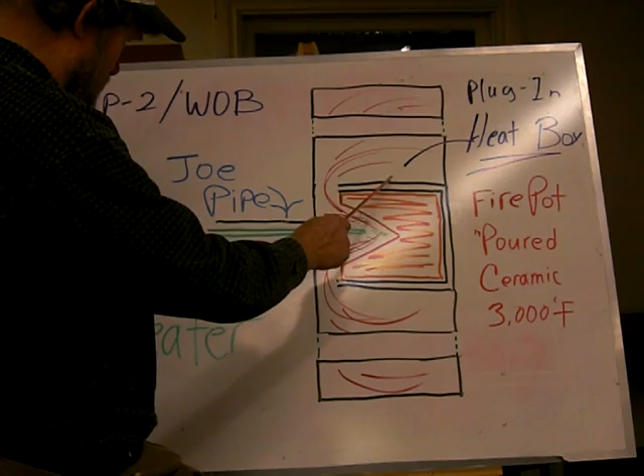And as I was saying in the first video, the heat plenum has an exhaust plenum around this. So you have to have somewhere for the exhaust to go through. So you allow the exhaust to filter around the heat plenum.

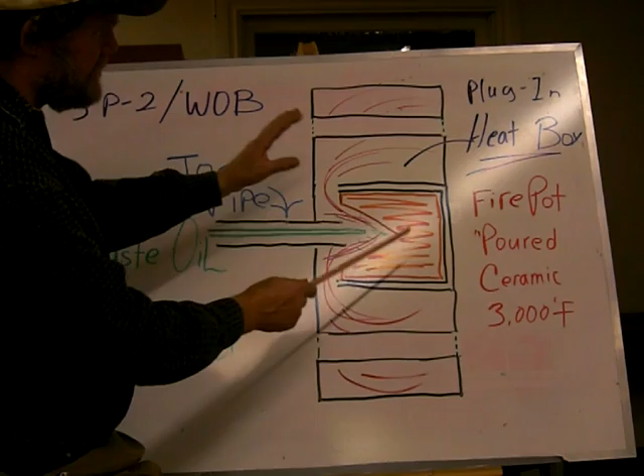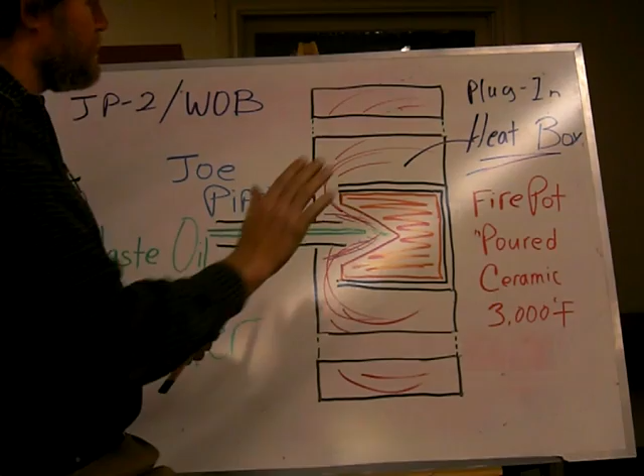And in order to lock one together with the other, basically the exhaust plenum would be suspended around the heat box. And that's one of the reasons for these pipes here, is that you could actually line up the bodies, take a pipe and slip it through the exhaust and into the heat plenum, and it would make the two units into one piece.

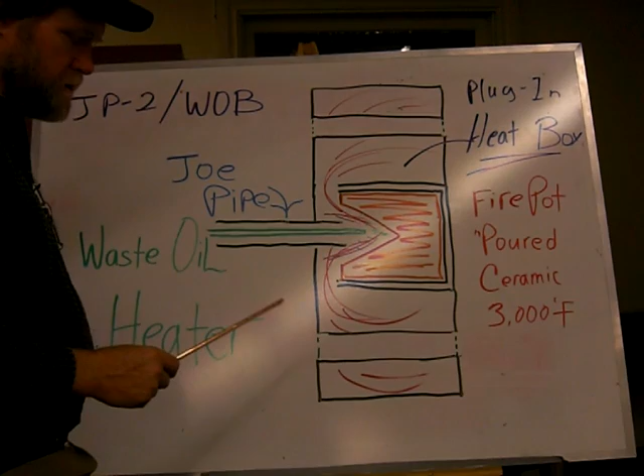So say for example these tubes could be filled with sand. You may have 6 large pipes at the geometric location here, and the inner part you probably wouldn't want these filled with sand, but on the outer ones you would, well, I guess you could fill them with sand. So the pipe that goes in there, like a keyway to lock everything into position, you could have it full of sand.

So the sand would pull out more of the, extract more of the heat, because you're talking intense heats here. And if you use sodium or salts for something like this, it wouldn't work. You just don't have the circuit for it.

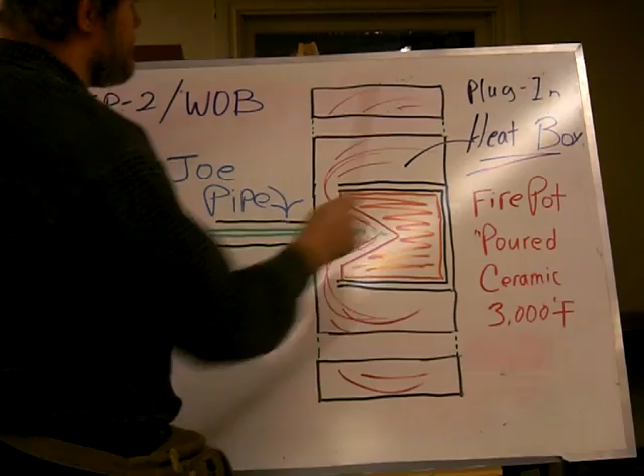And say for example, if you wanted to heat up hot water, you could have a sand cartridge already made up with a pipe going through it, just like those cartridges for soft water and all that. You just plug them in. You just plug your cartridge in here and snap on your water lines or steam lines, whatever you're doing, and you'd have almost a 24-foot area where the water would be heating as it's passing through, and more than one area.

And around your exhaust plenum, you would have like an outer plenum, and that would be your final plenum. And that might be a little wider apart.

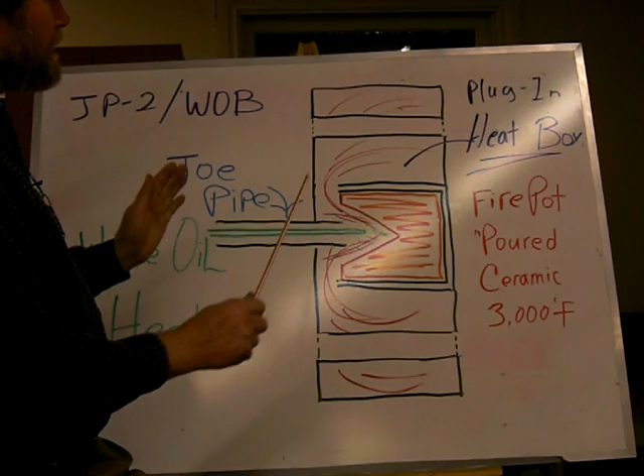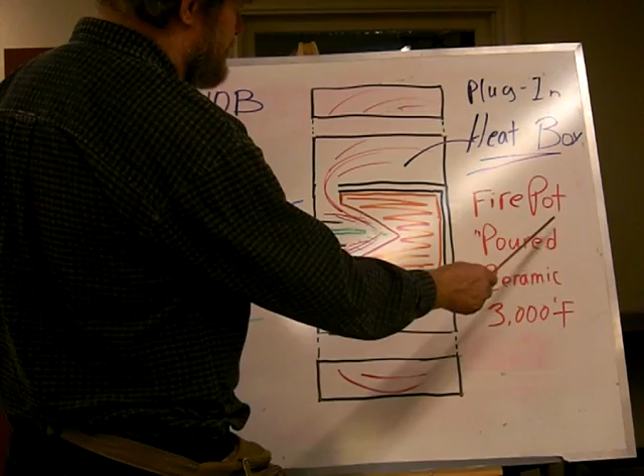So the heat's enclosed in here, the exhaust is enclosed in here, and all that heat wants to go out. So between your exhaust plenum and your air plenum, you might see anywhere from 400, 500, 600 degrees of heat, and maybe 400 or 500. I can live with that.

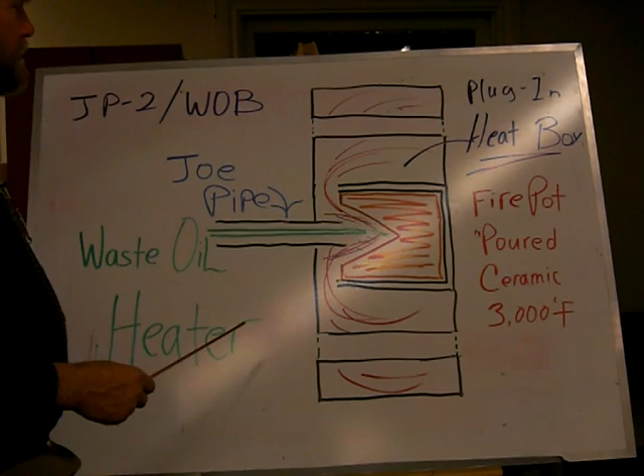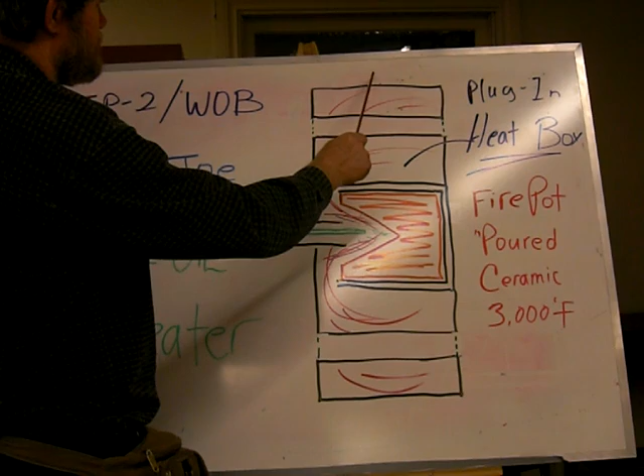So you have a large area that's very intense heat, and in your air plenum you might have holes around the periphery similar to this, and even in your exhaust plenum you could have holes going through where the exhaust heat would heat up the pipes, and you could maybe use that for just blowing outside air through. So the holes within your exhaust plenum would go into your air plenum.

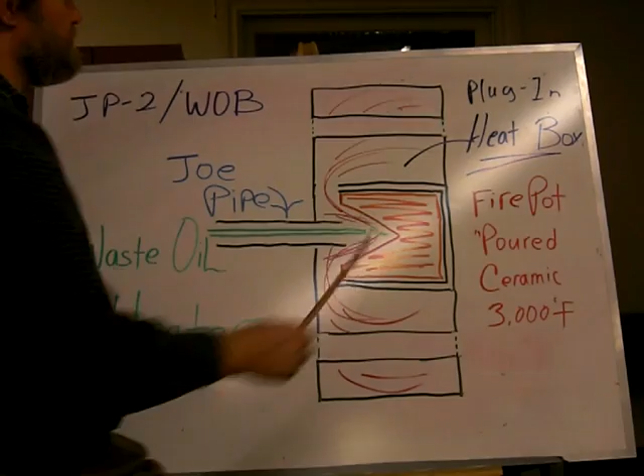And then all you do is have a big fan on the back, and you're just pumping 500 cubic feet per minute into the air plenum. So this side of the pipes would be connected open to the outside. So you'd have a good 6 pipes, about so big, a couple inches round, pumping out high volume air. And it definitely would work here.

So you'll be able to take your sand cartridges and put it in there. If you wanted to convert your hot air tubes into heating water, not a problem.

I know the Lord speaks to me. Most times He just puts the knowing in me, and just shows me the pictures. And in one moment at a time, you can see how, like envision the whole thing. And that's kind of where this came in.

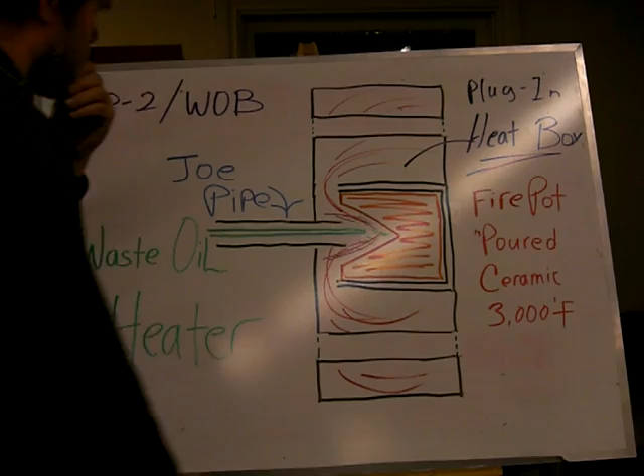And this could be made simply. And once we know that this is going to work, I'm kind of appealing to you experts out there. Is this going to work?

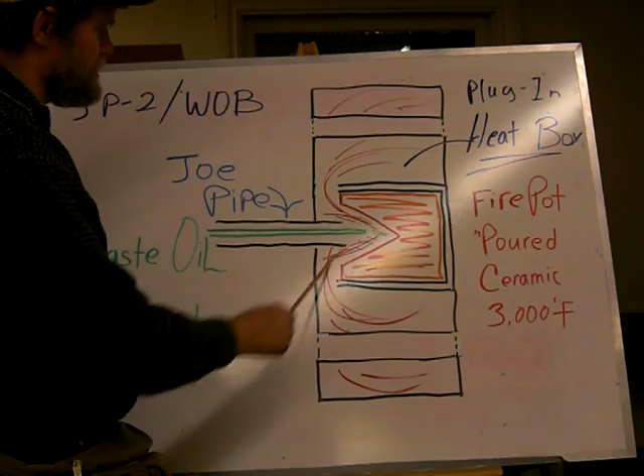Now, if you got your 2,000 degree flame going into here, and you might be adding steam in here to boost the heat from, say, 2,000 up to about 3,000 degrees. And so your fire would more or less be spun to the outside. And so you're doing your best to disperse the heat.

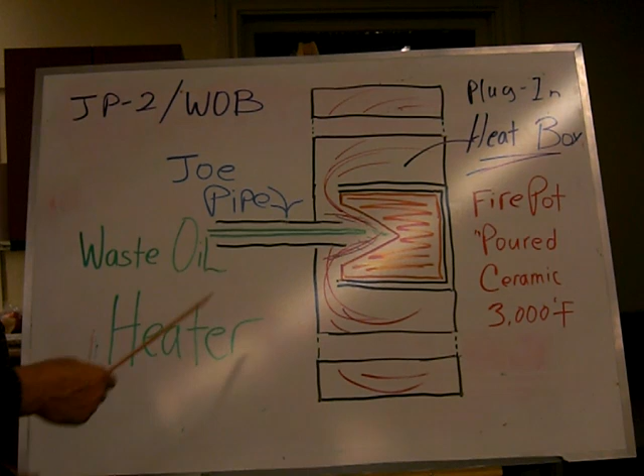Because otherwise I think the whole thing would go into meltdown. Or you could probably even keep it on low and it's still going to work.

A waste oil burner probably requires heat to be self-sustaining. If you're not going to use LPG or propane, but you need the intense heat here to flash the oil into the vapor state so you have your continuous burn. And I'm sure that this whole area here would be a nice glowing bright orange. It wouldn't take long, it's going to happen pretty fast.

Okay, this finishes the second part of the JP2 WOB series. Waste oil heater combined with the Joe pipe to make a more efficient waste oil heater. I'd like to hear back from you.